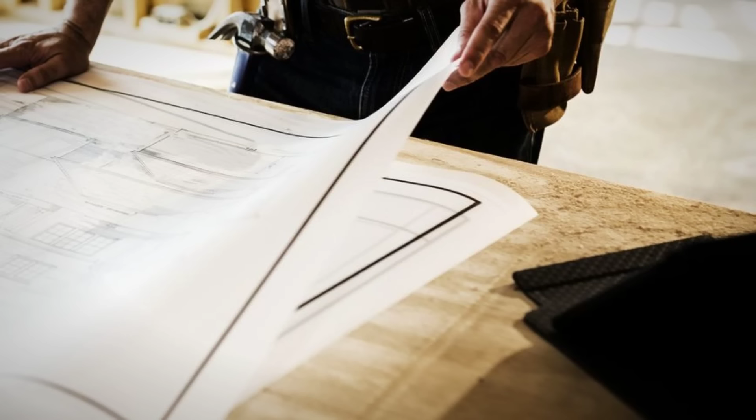That device quietly heated thousands of homes through the winters of 1977 and 1978. Then the energy crisis ended, oil prices dropped, and the plans went back on the shelf. They have been sitting there for 48 years. I found them last month.

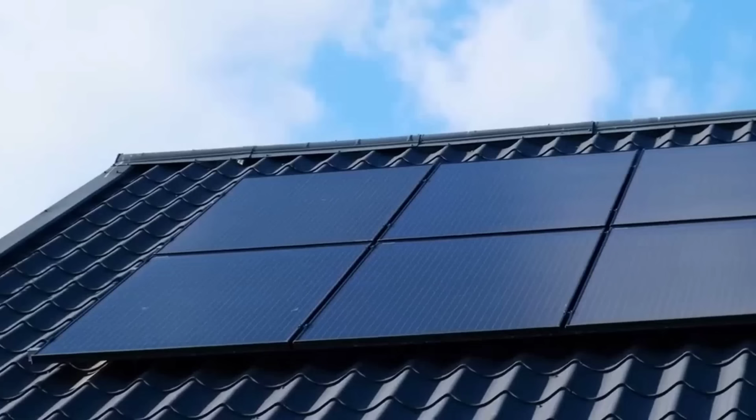What you are about to see is not a theory. It is not a prototype. It is a working system that produces 140 degrees of free heat even when the temperature outside is at freezing. And I am going to walk you through exactly how to build one this weekend for somewhere between $0 and $30, depending on what you already have sitting in your garage.

And stay with me until the end, because I am going to show you one specific modification. The 1977 plans did not include something I only learned after spending time with Amish builders in Holmes County, Ohio, that increases heat output by over 15 degrees without adding a single component to the build. I have never seen it mentioned in any solar guide, any homesteading book, or any video on this platform. Not one.

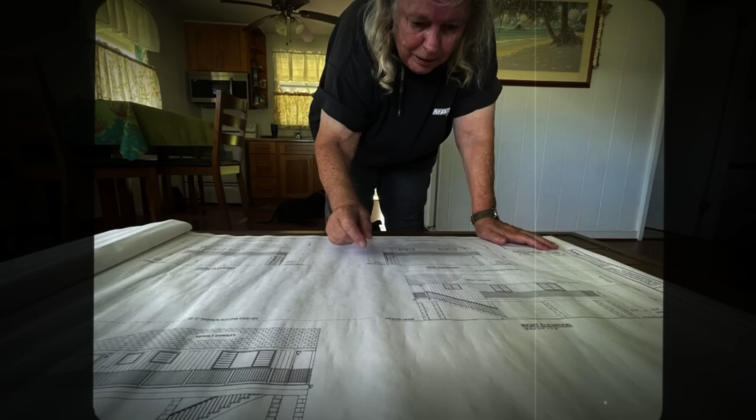Here is the thing that bothered me most when I first read those original plans. It was not complicated. It was embarrassingly simple. And the moment I understood the physics behind it, I could not stop asking myself one question. Why has nobody ever told me this before? The answer has nothing to do with the technology. The technology has been documented, tested, and published since 1977. The answer has everything to do with who profits when you don't know it.

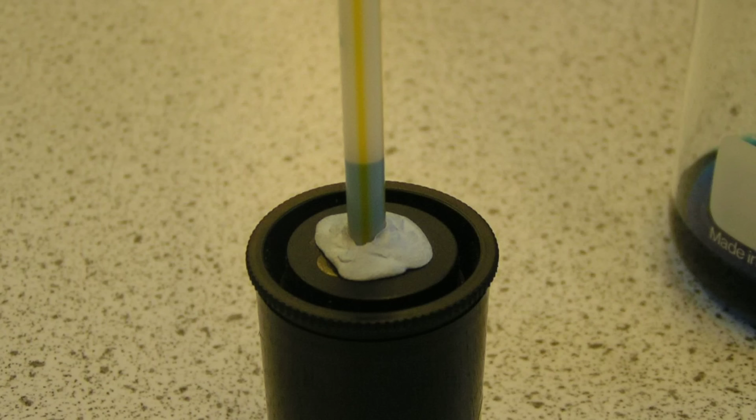A glass bottle painted flat black does two things at the same time. First, it absorbs solar radiation and converts it directly to heat. Flat black surfaces capture approximately 95% of incoming solar energy. That is not a rough estimate. That is a physical property of black surfaces confirmed in laboratory measurements for over a century. Now contrast that with white surfaces, which reflect back roughly 95% of the same incoming energy and convert almost none of it to usable heat.

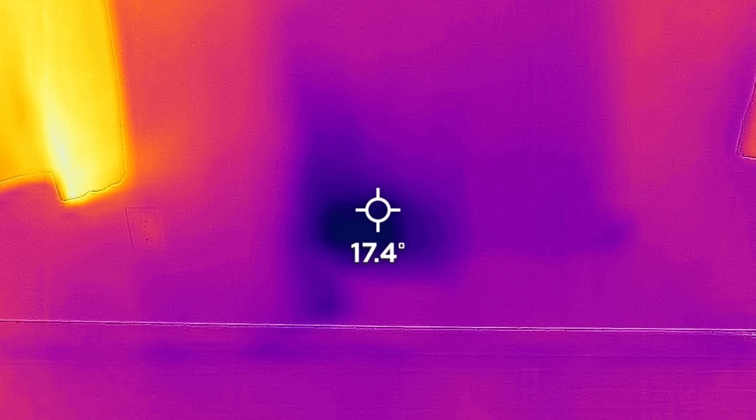The second thing the glass does is even more important. Glass allows sunlight to pass through on the way in, but it blocks infrared heat from escaping back out. That is the greenhouse effect, and inside a sealed collector box, it happens at the scale of a single bottle. The heat builds up inside faster than it can leave. A standard 4x8 foot panel receives approximately 3,200 watts of solar energy on a clear day. The glass bottle system converts more than 2,500 of those watts into usable heat. That is better than 80% efficiency.

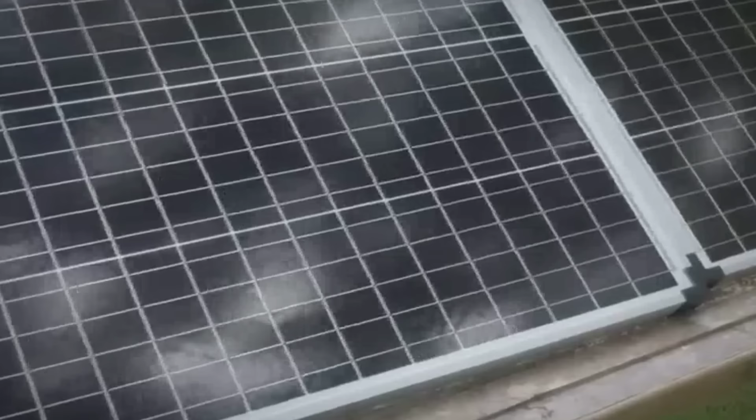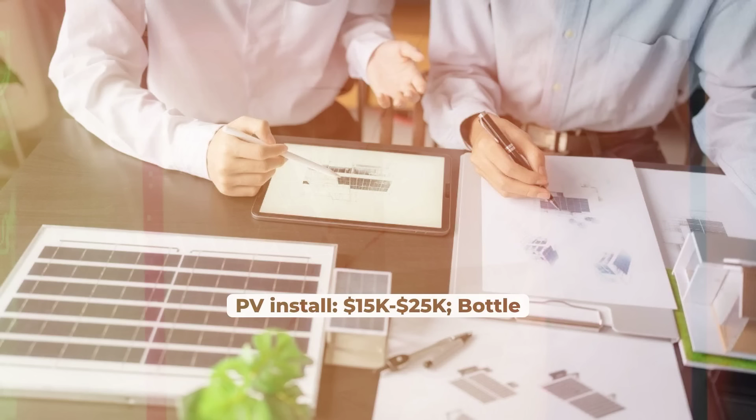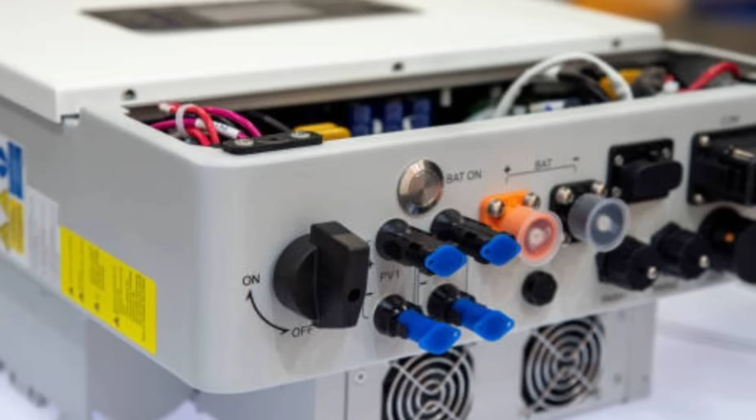Now here is the number that should stop you cold. Solar photovoltaic panels, the ones every energy company, contractor, and big box home improvement store has been pushing for 20 years, are approximately 20% efficient. One fifth. The average residential installation costs $15,000 to $25,000, requires permits, licensed installation, and produces electricity that then has to run through an inverter and a heating element just to warm your home. You are converting sunlight to electricity to heat, each conversion losing energy along the way.

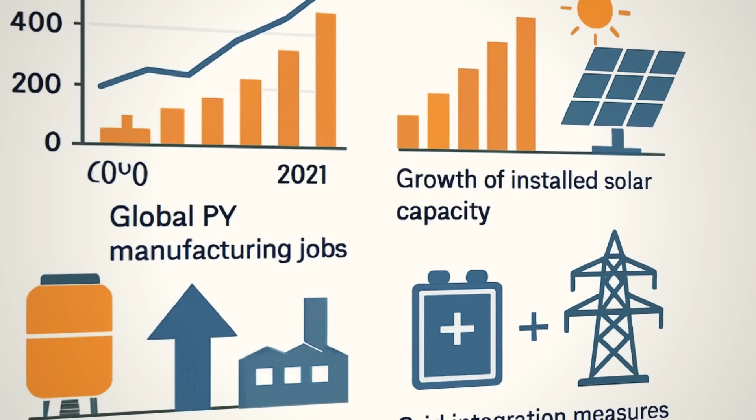The bottle collector skips every single one of those steps. Sunlight becomes heat. That is the entire process. 4 times more efficient, $30 or less in materials, no moving parts, no maintenance visits. In 20 years, nobody recommended it, nobody mentioned it, and that silence has been going on for 48 years.

I want to be precise about something here, because this audience deserves precision. There is no secret meeting where executives decided to hide this from you. There is no banned document. That is not how this kind of suppression works, and frankly, that version of the story is too simple.

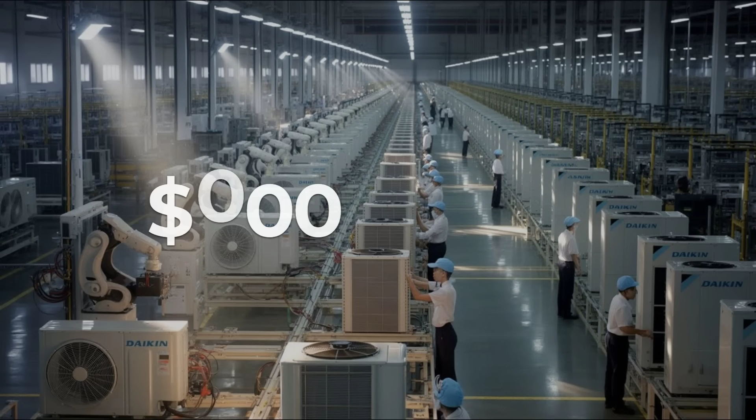The HVAC industry in the United States generates approximately $150 billion per year. Utility companies collect hundreds of billions more on top of that. Both industries are built on a single assumption: that your home cannot heat itself and that you need them to solve that problem for you.

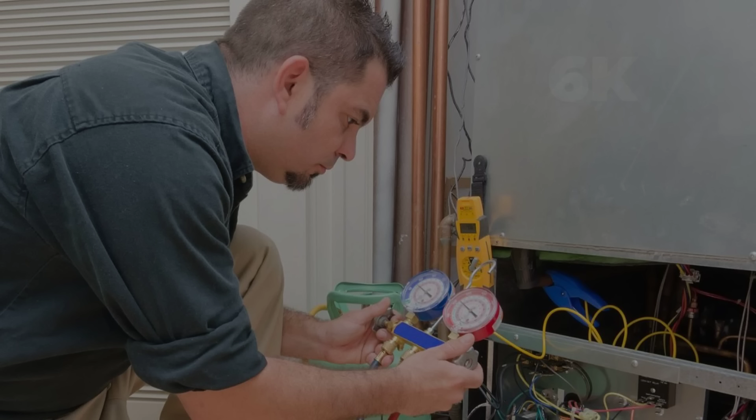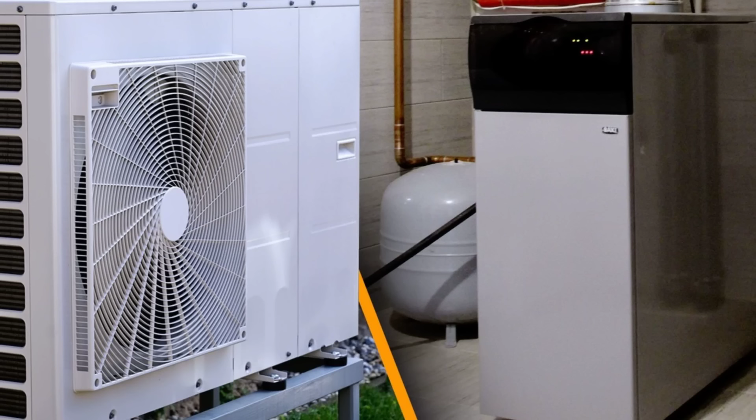When that assumption holds, the revenue flows. When it breaks, it does not. The contractor who walked through your house last winter and quoted you $6,000 for a new furnace was not lying to you. He was telling you everything he had been trained to tell you. The training programs that certified him were developed and funded by manufacturers who sell furnaces, heat pumps, and photovoltaic equipment. The bottle collector was never part of the curriculum because it was never part of the revenue model.

Mother Earth News published the plans in 1977. They called the device the heat grabber. The article is still on their website right now, free to read. It has been free to read since the Carter administration, 48 years of availability, 0 mentions from any professional in the building, HVAC, or energy efficiency industry in 4 decades. Not one contractor, not one energy auditor, not one utility rebate program, 0. That silence is the story.

Now let me show you how to actually build this, because the construction is genuinely simpler than almost anything else you will find on this channel. You need a wooden box, 4 feet by 8 feet, roughly 4 inches deep. If you have scrap lumber in the garage or barn, this costs nothing. If you need to buy it, you are looking at $10 to $20. You need glass bottles, beer bottles, wine bottles, sauce bottles. Size and color do not matter much, though darker glass absorbs slightly better. You need enough to fill the box in a single layer, which is roughly 40 to 60 bottles.

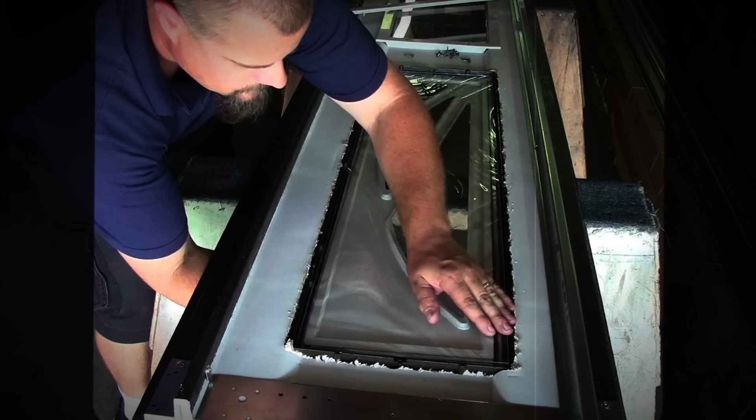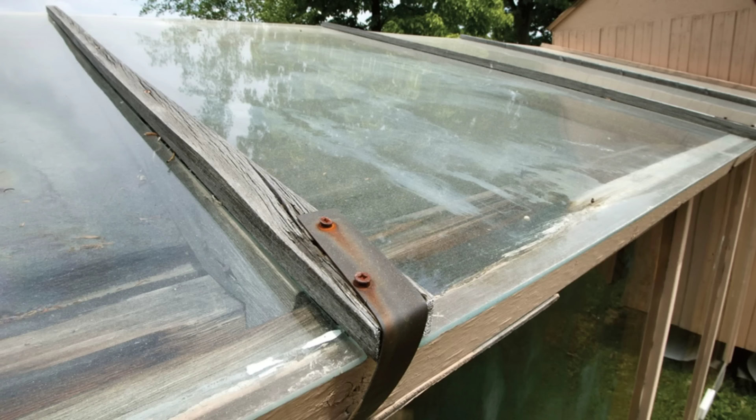You need 1 can of flat black spray paint, $5 at any hardware store. You need a clear front cover. An old storm door pane works perfectly. A sheet of polycarbonate from a home improvement store costs $15 to $30, or you pull it from something destined for the trash. That is the entire materials list for the collector itself. You paint every bottle flat black. You paint the interior of the box flat black. You pack the bottles tightly in rows inside the box. You cover the front with your clear panel, sealed around the edges to trap the heated air.

Then you cut 2 holes in a south-facing exterior wall, one low, about 6 inches from the floor, for cold air intake, and one high, near the ceiling, for hot air output. You mount the collector flat against that wall at a 45 to 60 degree angle, lining up those 2 holes with the collector openings. That is the complete system. No pump, no wiring, no electricity of any kind required. The physics runs the loop from there.

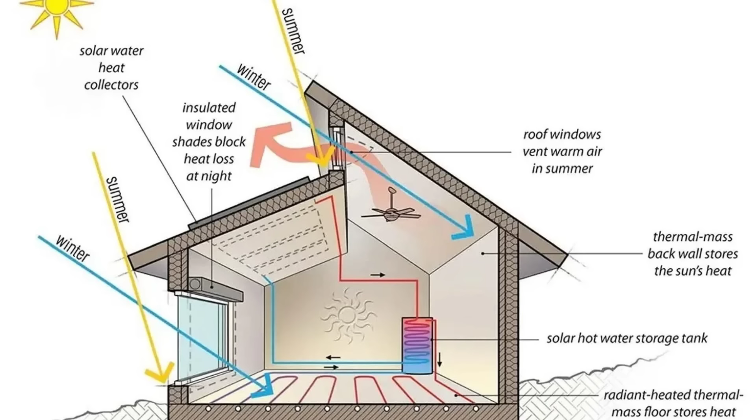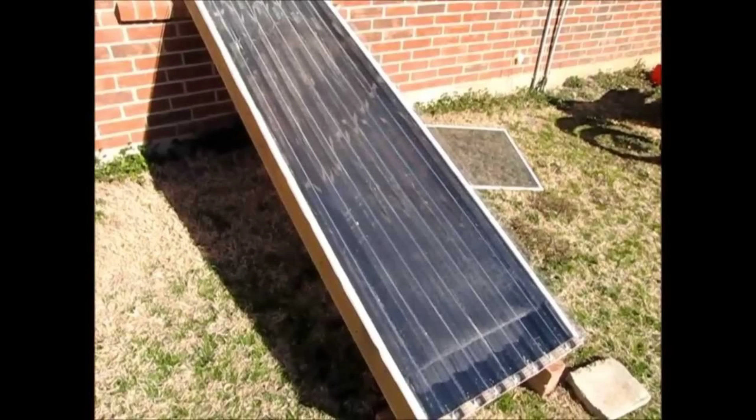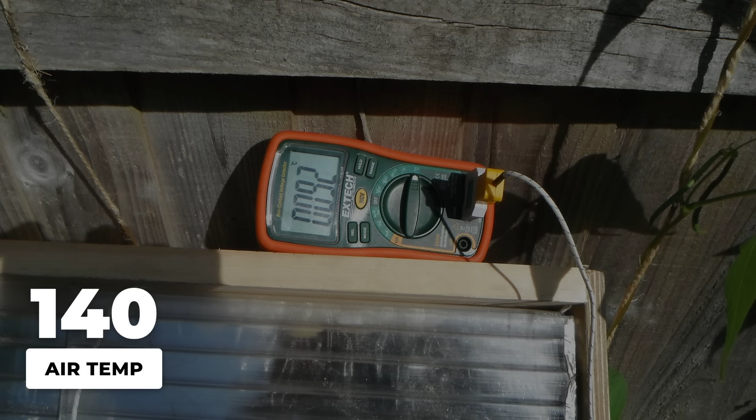Sunlight heats the air inside the collector, hot air rises and pushes out through the top hole into the room, cold room air pulls in through the bottom hole to replace it. The cycle runs continuously as long as the sun is shining. The moment clouds arrive, the airflow slows. The moment the sun returns, it starts again. Builders who have instrumented these systems with thermometers report output air temperatures of 140 degrees Fahrenheit when the outside temperature is 32. That heat is entering your room continuously, for free, for as long as the sun is up.

Now, if you already own a house and you are thinking this is only for people building from scratch, stay with me, because this next part is specifically for you. I hear the same objection every time passive solar comes up. People say their house faces the wrong way, their walls are already finished, they cannot cut holes in their siding without permits and contractors. Here is what is actually true. The window-mounted version from the original 1977 plans requires no wall penetration whatsoever.

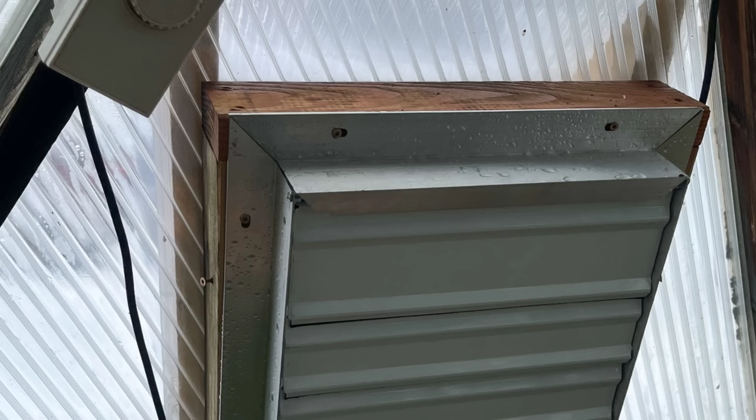You mount the collector directly over an existing window. The window itself becomes your intake and output. Cold air flows out through the bottom sash opening, circulates through the collector, and warm air returns through the top. When winter ends, you remove it and store it flat in the garage. No permanent modification, nothing structural, nothing that requires a permit in any jurisdiction I have ever researched. Builders have installed these on garages, detached workshops, and basement utility rooms, the spaces that are always cold, always running a space heater, always costing money from October through March.

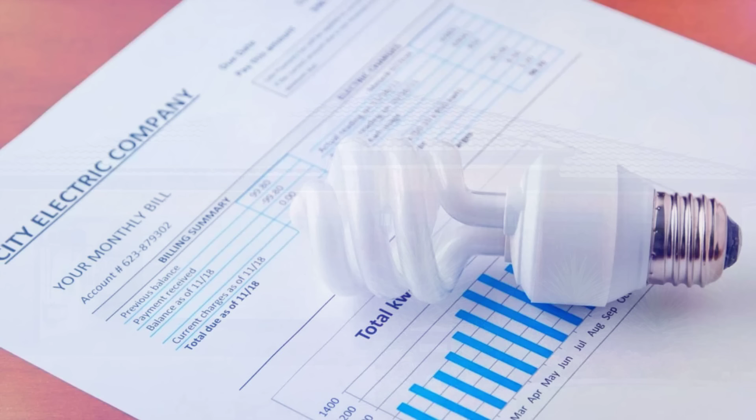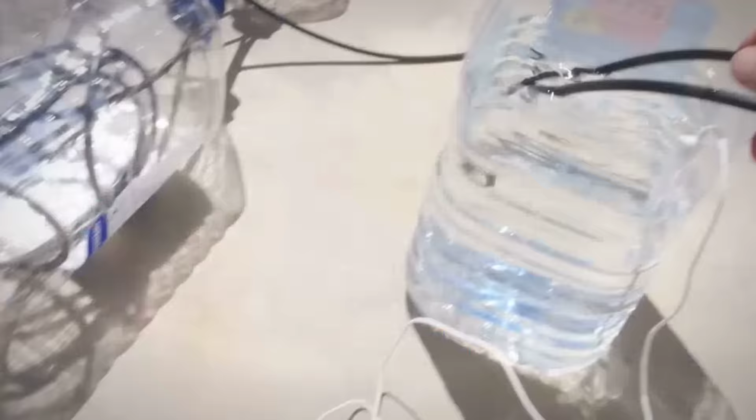One builder on the Instructables platform documented his unheated garage rising from 28 degrees Fahrenheit at dawn to 62 degrees by midday using two 4x8 panels, no propane, no electric heater, no supplemental heat source of any kind, just old bottles and sunlight.

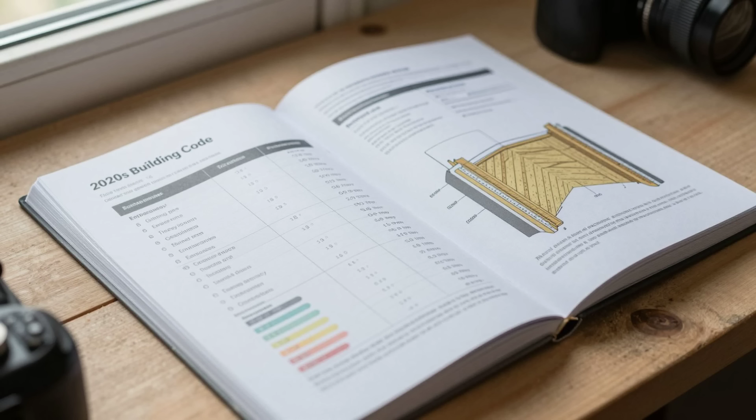If you own a home built before 1980, and a significant portion of the people watching this do, those homes were constructed when heating fuel was cheap and insulation requirements were minimal. They bleed heat through walls, windows, and attic planes at rates no modern building code would permit today. A bottle collector does not fix all of that, but it adds free heat during the hours you need it most without touching a single thing you have already built. And if you ever move, the collector moves with you.

Now I want to deliver on the promise I made at the beginning, because this is the part nobody put in the 1977 plans, and it is the part that changed the output numbers in my own testing. When I spent time with Amish builders in Holmes County, Ohio, I noticed something about the way they arranged materials inside their south-facing passive walls.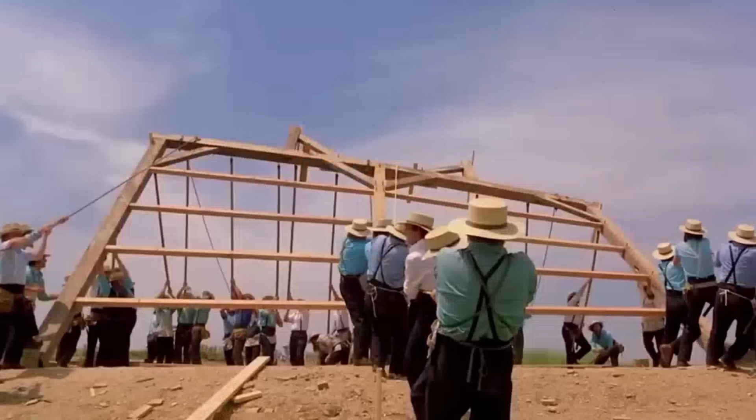The Amish do not use the phrase solar collector. They do not use the phrase passive solar either. They have a much older and simpler name for what they build. They call it the south wall. And they have been building south walls into their homes for generations, long before the term showed up in any engineering program.

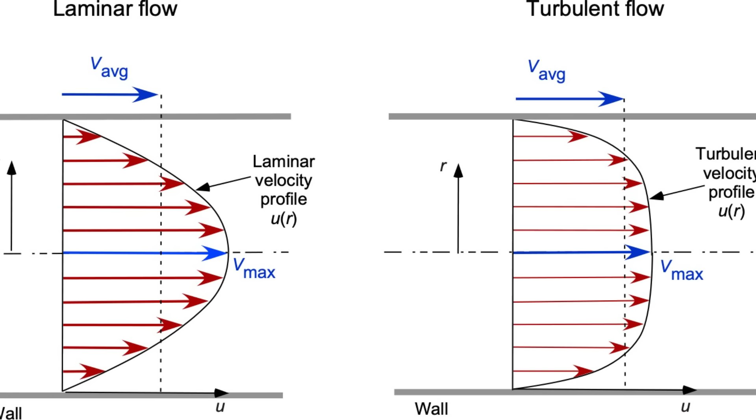What those builders showed me, and what I later confirmed by measuring output temperatures myself, is this. The direction the bottles face inside the collector determines how much heat the moving air actually captures before it exits into the room. Most people who build these pack the bottles uniformly. Every neck pointing the same direction, every base pointing the same direction, clean rows, organized. It makes the build feel tidy. The Amish builders alternate them. Neck pointing left, then neck pointing right, then left again, down every row.

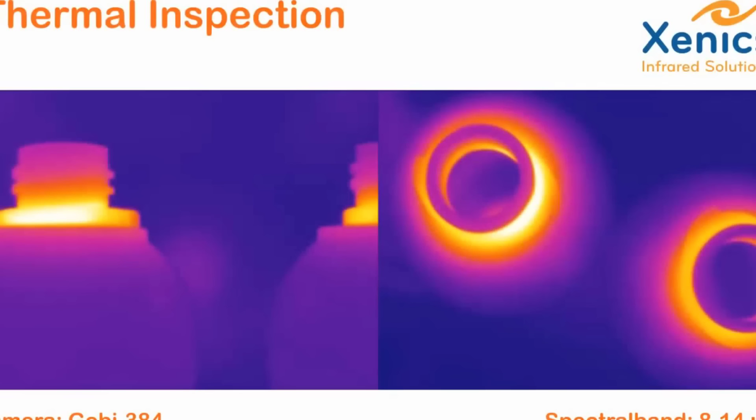When you arrange the bottles that way, the air moving through the collector cannot travel in a straight line. It has to curve around every bottle neck. It tumbles. It creates what physicists call turbulent flow. And turbulent flow does something critical. It forces the moving air into contact with the hot glass surfaces far more often per foot of travel than air moving smoothly in a straight line. More contact with hot surfaces means more heat transferred to the air before it exits, and more heat in the exiting air means warmer rooms.

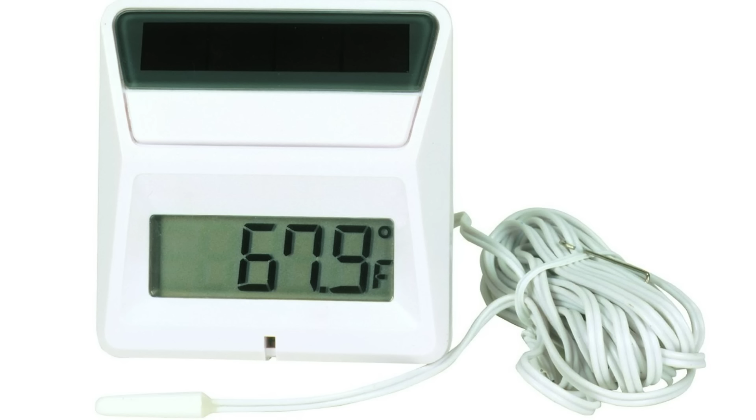When I changed my own collector from uniform rows to alternating necks, the output temperature at the same sun angle on the same day increased by more than 15 degrees Fahrenheit. In a system that already cost me nothing to build, 15 free degrees is not a small return. It is the difference between a collector that takes the edge off and one that actually heats the room.

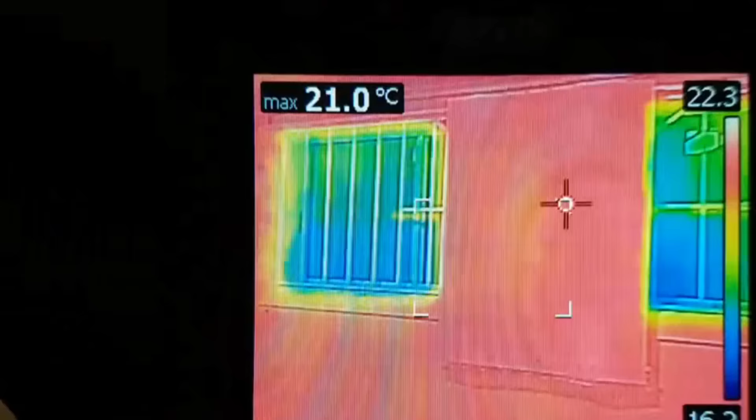The communities that have been doing this for generations did not call it turbulent flow. They did not call it anything technical. They just called it the way that works better. And they have been building it that way for as long as anyone in those communities can remember.

You did not learn a trick today. You learned that a 75-cent magazine from 1977 held the answer to a problem the energy industry has been charging you to solve for your entire adult life, and that the people who quietly kept building it the right way never stopped. If you are the kind of person who believes that real, practical knowledge gets quietly set aside when it threatens someone else's revenue, you already know what this video just confirmed.